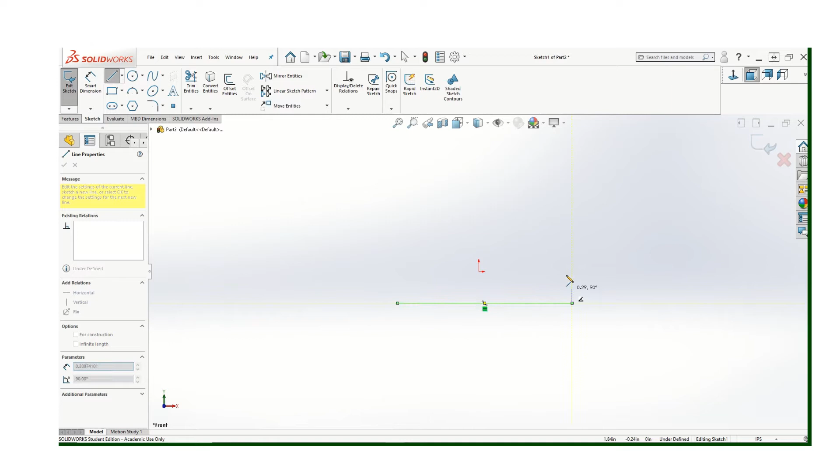So in this video, I'll go over a couple of questions I've been having about some general sketching and modeling tools and menus. So let's just start out with a simple sketch. So you'll notice that these lines are blue. Blue means they're not constrained. It just means they're not fully controlled.

You can constrain them or control them using dimensions or also using relations, for example, horizontal, vertical, tangent, perpendicular, so forth. So for example, this line here, if I want that to be vertical, it's easy to add. Just go up here, add a relation, click on the line, and you can see the options that I have here. I can make it horizontal or vertical or fixed. If I click on vertical, you'll see it'll correct it to a vertical line, and it'll put that little symbol on there.

And notice these have the symbols for showing that it's horizontal. So that's one kind of a constraint. The others are dimensions. So as you dimension, that's another way to add a constraint. Notice everything's still blue.

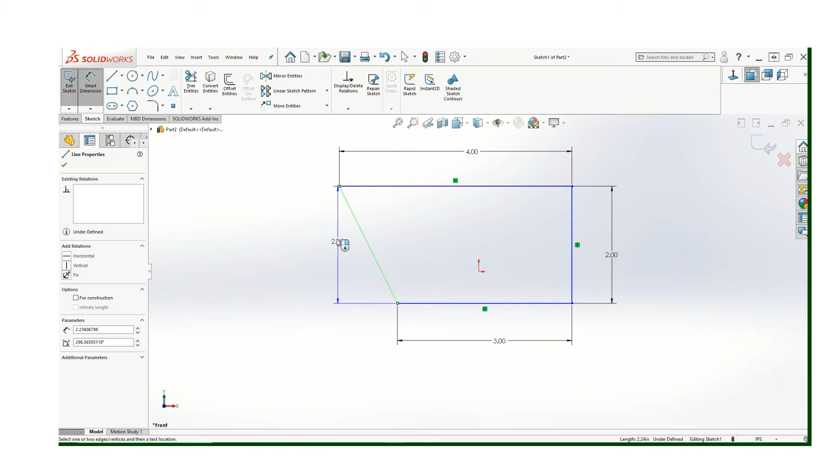As far as dimensions, how they're oriented, it has to do with how you move your mouse. If you click, like this line's on an angle, if I click on this line, then it's going to make a dimension. It's called an aligned dimension. But if I move my mouse around, I can adjust it to a horizontal or a vertical dimension. If you click on the endpoints, same thing happens, right? Depends on the situation as to what you're looking for.

Now this dimension doesn't make any sense because I've already got it over there. So if I wanted to put that on there, you've got an option here. I could dimension it like that, or I could put an angle on it. Now one thing you'll see is because I have these other three dimensions on there, if I try to put that dimension on there, it's going to give me an error because I already have that dimension, just because again these three dimensions create the situation where that can only be one dimension or one angle. Same thing if I try to put an angle call out on there, it's going to give me an error. I don't need that dimension.

So the question is, why are these still blue? Because the software wants to know where this shape is in relation to the origin. Oh, also interesting, if you look at the bottom, you'll see it says underdefined. It means it's not fully defined. Okay, so all I need to do is dimension this to the origin. And if you had another feature, like let's say we had a hole in the part, what I would do is use that to locate and just put the hole at the origin. You don't have to do that.

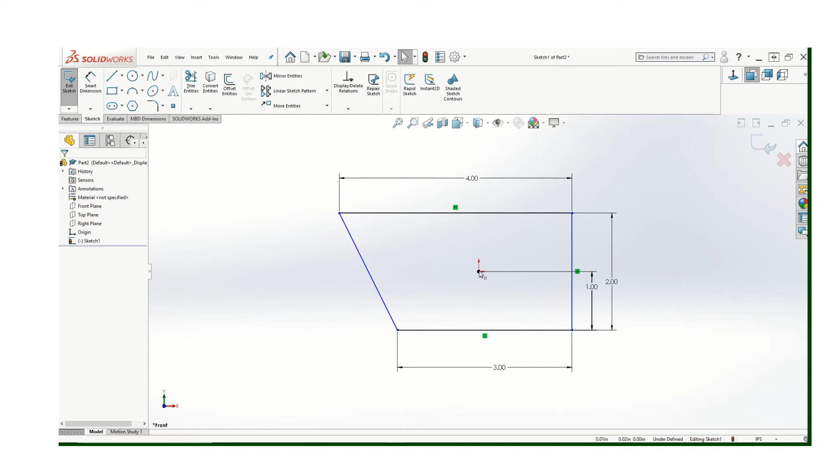Notice these two have turned black because they're fully constrained. These two are still blue. I'm still missing something there. And now notice everything is black. So that means that it's fully constrained.

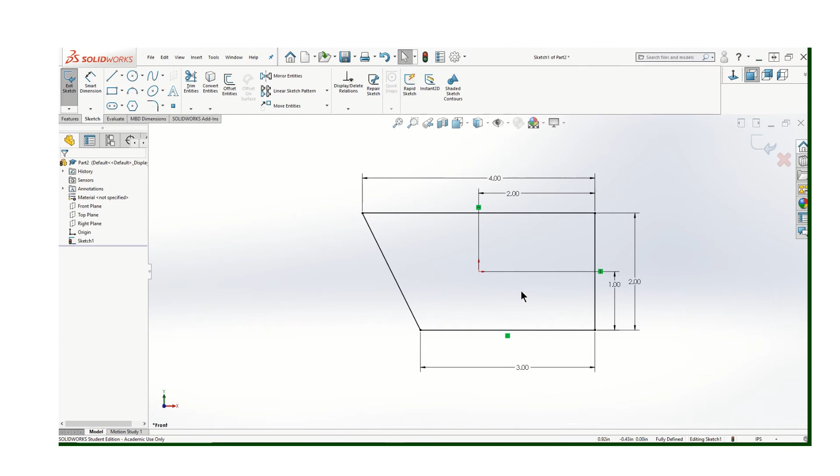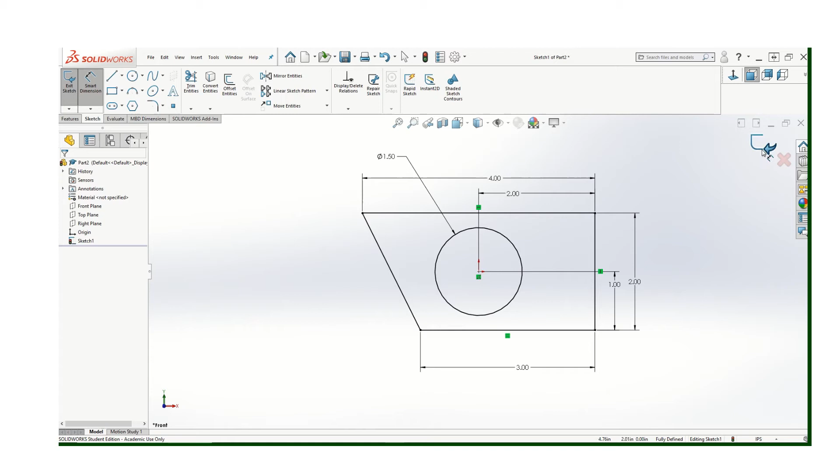And let's go ahead, since I talked about that, let's put a hole in here. Making this up as I go. Now that's blue because I don't have the diameter on it yet. There we go. Okay, that's fully constrained. Now you don't have to have the sketch fully constrained, but it's a good idea because it tells you that you have handled all the dimensions and the part can only be one size.

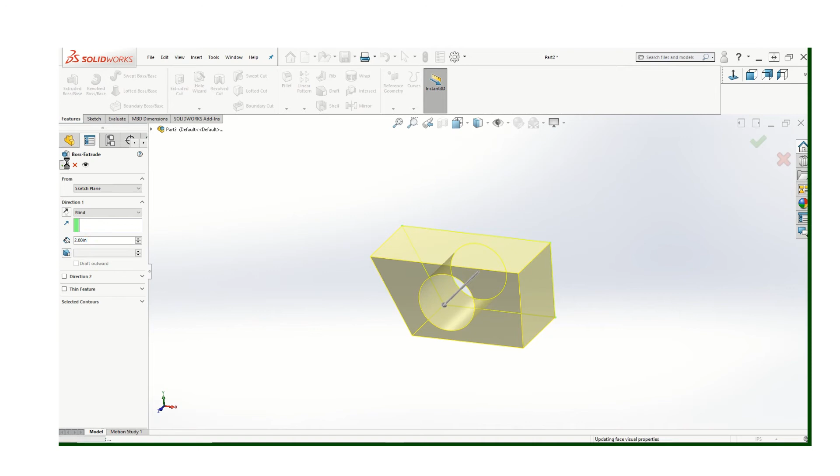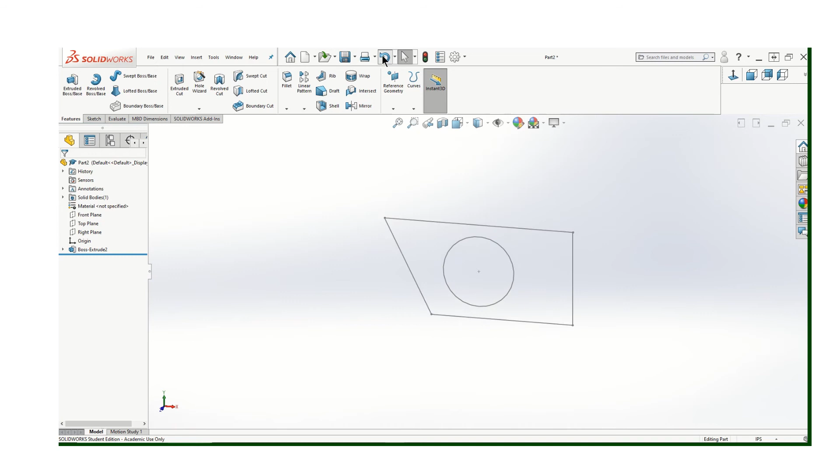Now when you go to do an extrusion, whether it be a cut or a boss base, you can only extrude one thing at a time. So in this case, I have a hole in the part. That's not a big deal. What if my intention was to make this a boss that stuck out? I can't do that. Can't do it in one pass. I'd have to do a separate extrusion. Right, so I have to do that, and then I have to come in and make a new sketch, and then create that boss that would be a solid body, right? So you can only extrude one thing at a time.

You have two things, like I have two sketches sort of. If you come down here where it says selected contours and click on that, then I can click on that circle and it'll identify that, make it separate. It's separated so I can get my sketch looking the way it's.

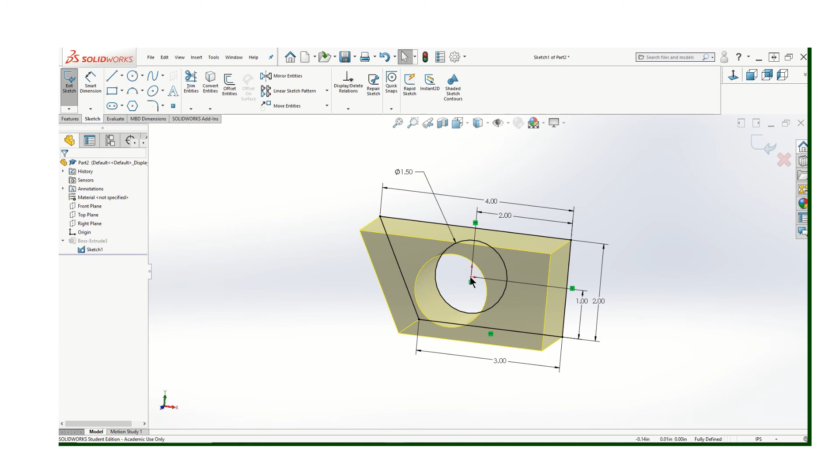Now if you want to edit the sketch, just go over here. We only have one extrusion, but if you hold your cursor over there, you'll see it'll highlight. If you click on that little arrow, there's your sketch. If you right click that and click on edit sketch, now I can change it. For example, if I wanted to make that 1 inch, finish it, it'll edit.

If I wanted to edit the extrusion, right click on the extrusion rather than the sketch and say edit feature. And now let's say this was supposed to be 1.5. I can change the extrusion. So again, just by right clicking those, I can edit them.

Let's see, one thing that you may want to do, especially when you're building assemblies, is all your models are going to show up as this gray. When you start to build assemblies, it's nice to have different colors. And for a presentation or something, that's great. Typically, we don't worry about that too much. It's really just a visual tool.

But if you wanted to make this look different, and if you were looking for mass properties, for example, I wanted to know the density of this or center of gravity, then I can actually select a material instead of this just being a generic gray thing. If you come over here where it says material, it's not specified. If you come up here and right click and see where it says material, now you can edit it.

Now these are the ones I've used recently, you can change it, and now it says, see where it says malleable cast iron right there. Again, right click, material. If you're just going for a different look, you can just do something like that. And so now it's 1060 alloy. You can see that there. So that's easy to do to change the material.

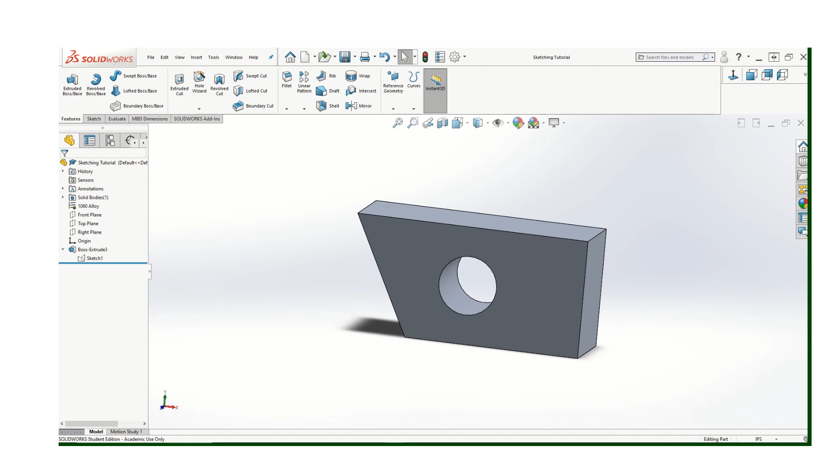Let's see, also put this on a drawing sheet. I wanted to talk about that dimension thing again. So when you're dimensioning this angled surface, if you wanted to have an aligned dimension, click on the line. That'll give you that kind of a dimension. If you want to have the vertical dimension, then click on the endpoints. Now you can get the vertical dimension. Okay, so that's the difference. Clicking on the line or clicking on the endpoints. Slightly different than when you're building your model.